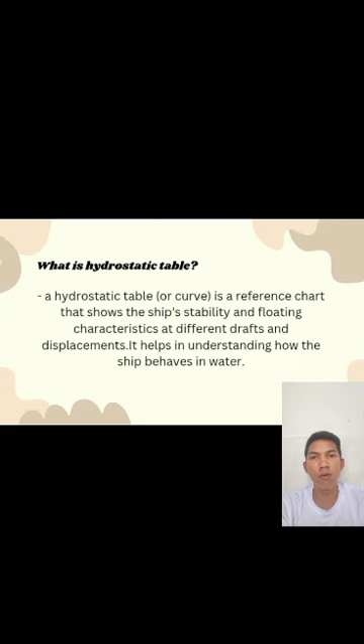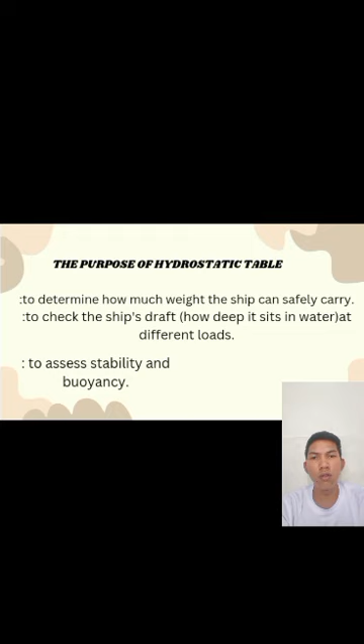Purpose: to determine how much weight the ship can safely carry, to check the ship's draft at different loads, and to assess stability and buoyancy. Key parameters in the table.

Typical hydrostatic tables include draft, the depth of the ship in water; displacement, the total weight of the ship including cargo, fuel, and crew; and trim, the difference in draft between forward and aft ends.

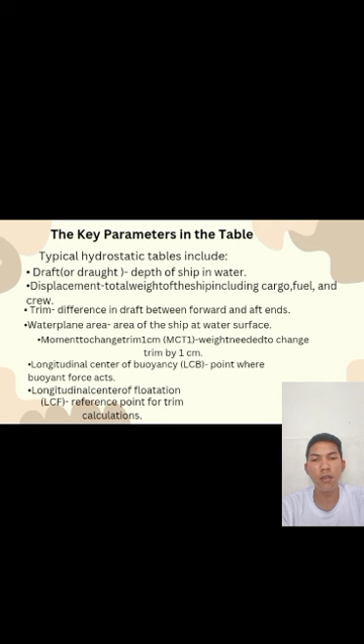How it is used: before loading, officers check the table to ensure the ship is balanced and stable. Engineers use it to calculate how fuel consumption or cargo shift affects stability. It helps in planning a safe voyage under different sea conditions.

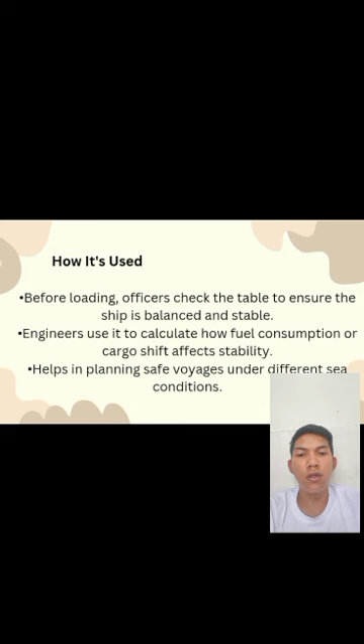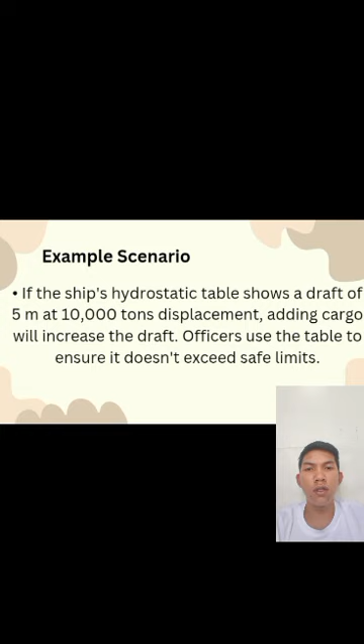Example scenario: if the ship's hydrostatic table shows a draft of 5 meters at 10,000 tons displacement, adding cargo will increase the draft. Officers use the table to ensure it doesn't exceed the safe limit.

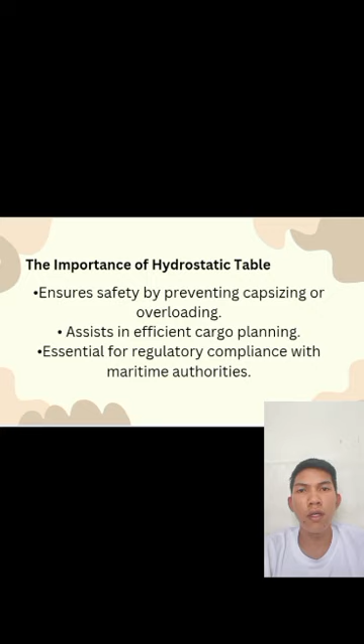Importance: it ensures safety by preventing capsizing or overloading, assists in efficient cargo planning, and is essential for regulatory compliance with maritime authorities.

Connection to stability: hydrostatic data is directly used to calculate metacentric height, GM, which measures ship stability. Higher GM equals more stable, lower GM equals less stable.

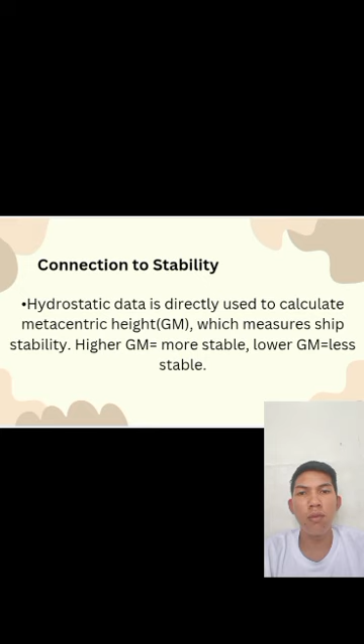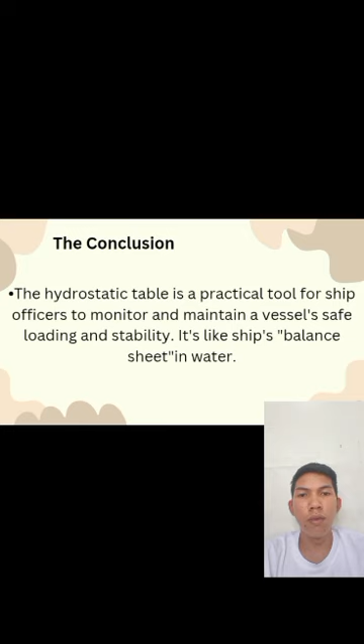Conclusion: the hydrostatic table is a practical tool for ship officers to monitor and maintain a vessel's safe loading and stability. It's like the ship's balance sheet in water.

The definition of displacement: the weight of the water displaced by the ship, equal to the total weight of the ship plus cargo plus fuel plus stores plus crew. In hydrostatic tables, displacement changes with draft.

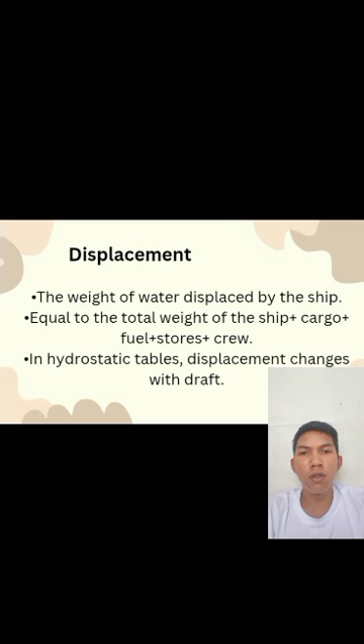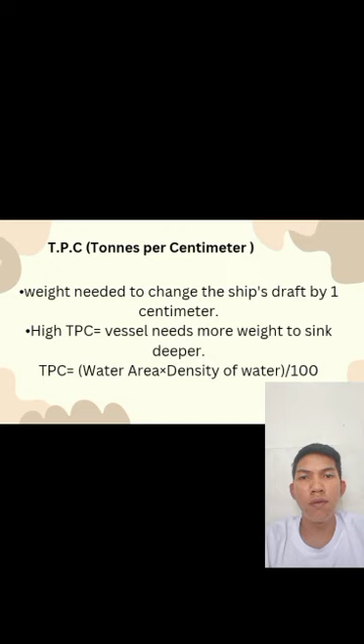Next, the definition of TPC, tons per centimeter: the weight needed to change the ship's draft by 1 centimeter. High TPC means the vessel needs more weight to sink deeper.

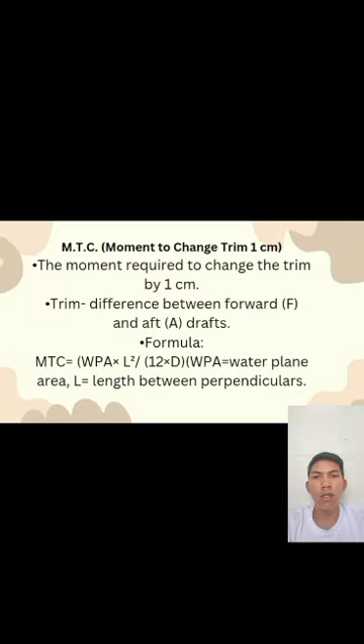Next, the definition of MTC, moment to change trim 1 centimeter: the moment required to change the trim by 1 centimeter. Trim equals the difference between forward and aft draft.

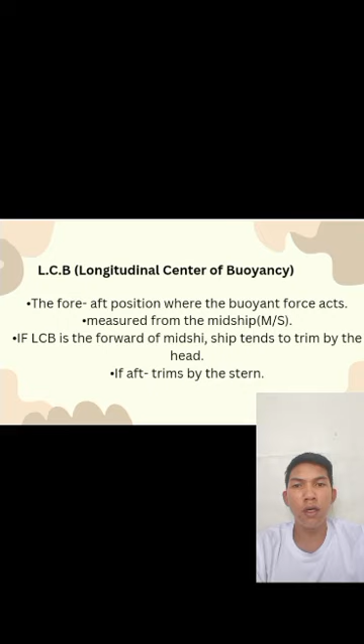Next, the definition of LCB, longitudinal center of buoyancy: the fore-aft position where the buoyant force acts, measured from midship. If LCB is forward of midship, the ship tends to trim by the head. If aft, trim by the stern.